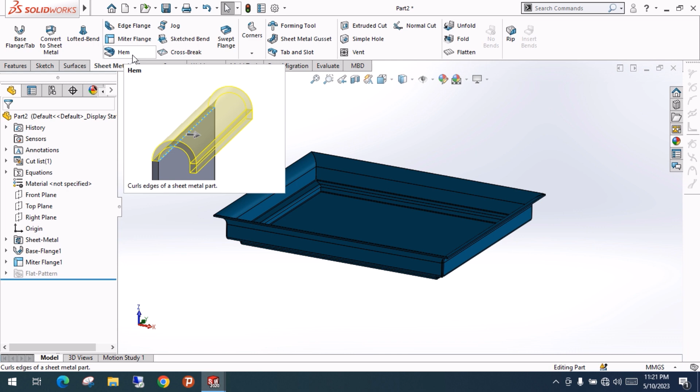We'll use hem for folding our outer edges. So how does it work? Let's see.

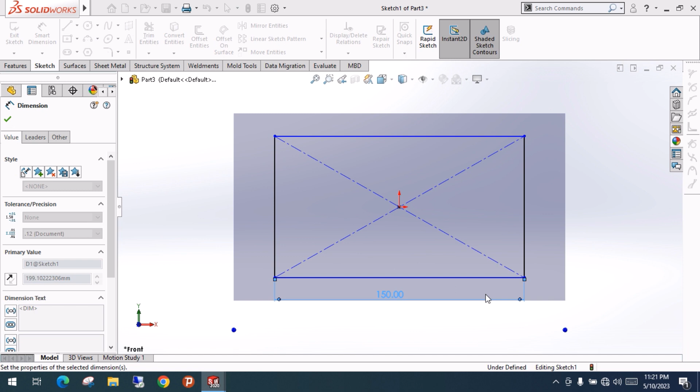I'm going to create a new part, clicking OK. Let's suppose we have a flat plate of some dimension. I'm just going to create a rectangle here, giving 150 - I'm taking a random dimension, you can take whatever you want. I'm just going to sheet metal and go to base flange and click OK. So this is our base plate.

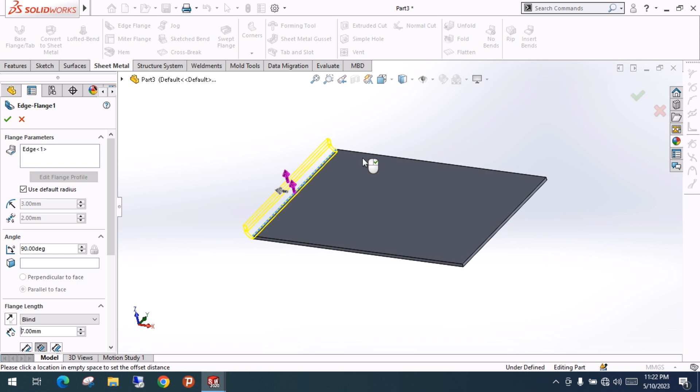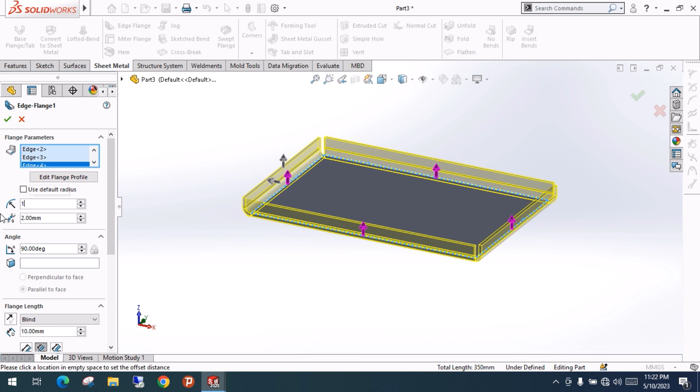I'm just going to create an edge flange here. So click here and select all four edges. I'm just giving the distance of 10 mm. We have to reduce some radius and it will be okay. So this kind of our plate is there.

You can just change the thickness a bit - let's suppose 0.7 thickness. This is actually a very less thickness. If you see here, these edges are sharp edges, you can say. If you want to fold these edges, you can just fold them by performing this hem operation.

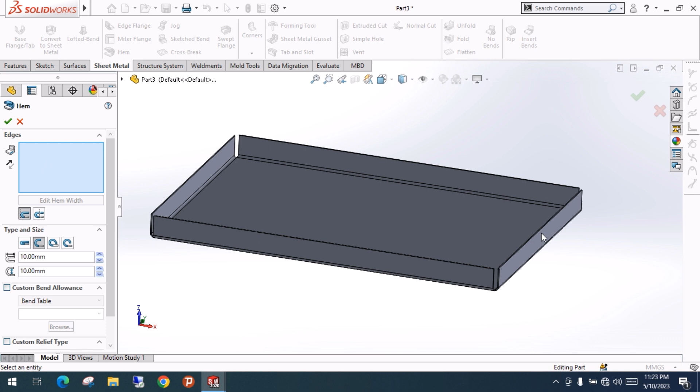So we will see the hem operation. We're going to select hem operation, and here we have to select the edges. I'm just going to select this edge here. By default, it is taking the whole edge and performing the hem operation, folding the plate over this side.

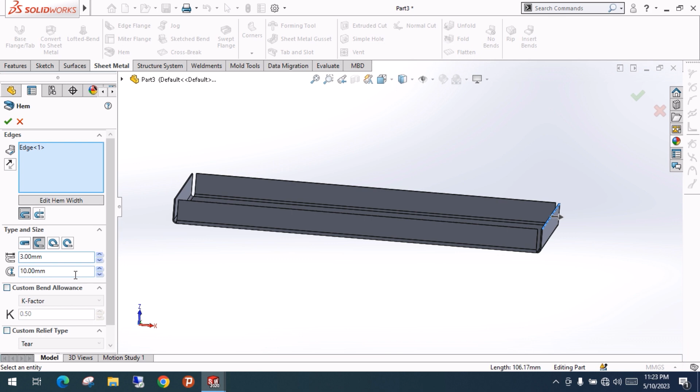So you can control the parameter here - this is thickness. You can just want like a 1 mm fold. Give it like 3 mm and give the radius around 1 mm. So it is folding like this.

You can control this fold from here as well. Suppose you want to fold the whole - if you don't want a gap between this folding and this base line, you can click this one, so there will be no gap, and you can click this one.

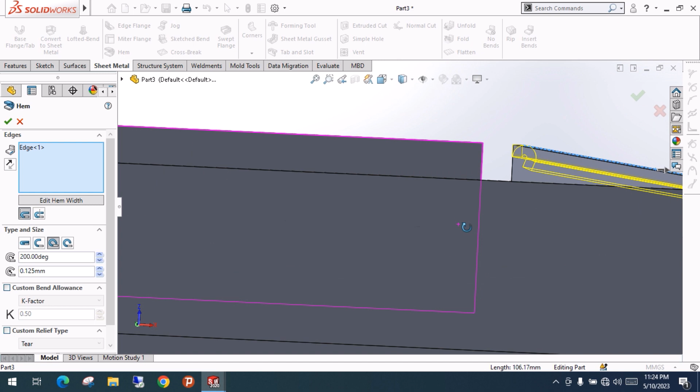You can also use the teardrop. What will teardrop do? It will just do some kind of folding - you can make a circular profile and then connect to the face of this edge.

And another one is the roll. In roll, you can control the angle here also, like if you give a 270-degree angle.

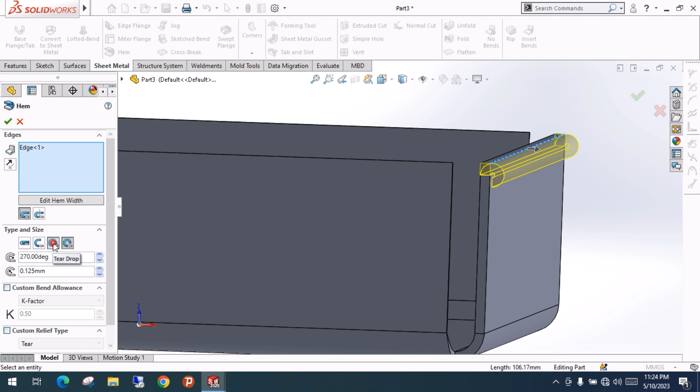What is the difference between this one and this one? If you see here, the end face is parallel to this one, as you can see here, and in this one it is tear drop. If you increase the angle here, like 245 or 225, the face is along this line - it is not parallel to this one. So this is the difference between them.

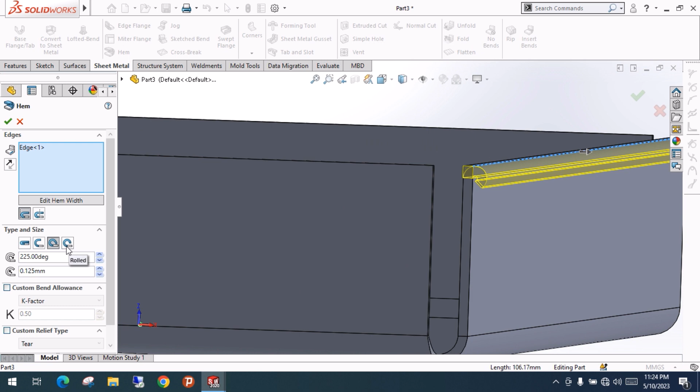Another thing you can do here - just make this one as it is, and we will perform another hem on the other edge. So I'm just selecting this one, and here is the option for hem, edit hem width.

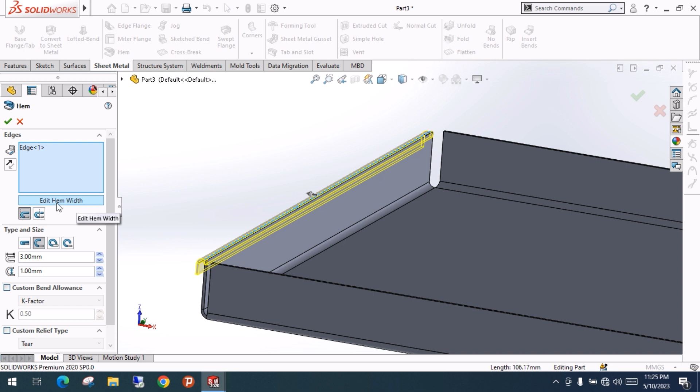If you click here, it says the sketch is invalid - you can perform the sketch and edit the sketch. Don't do anything with this one, just click on this line, whatever the sketch you have, click this and delete this constraint and move this line.

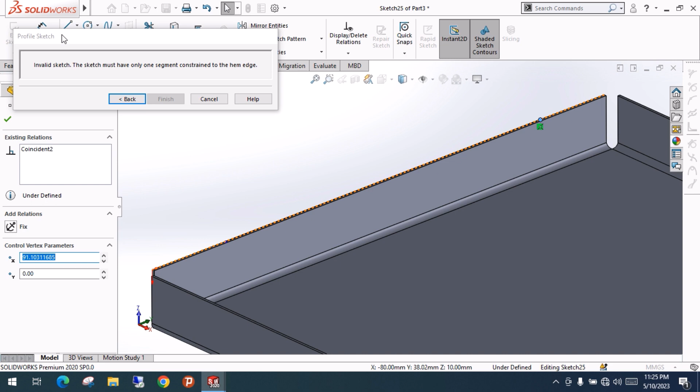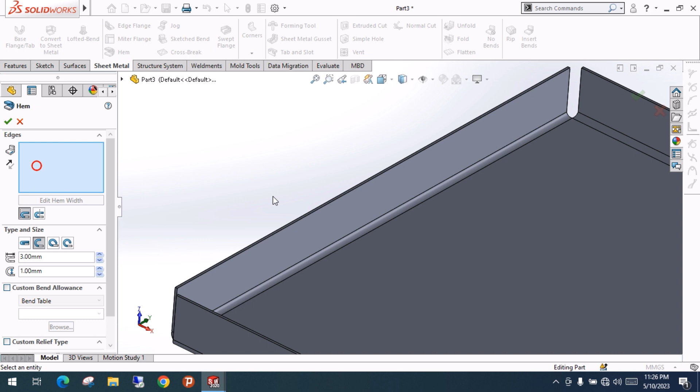We will just try one more time. So for hem, we have to first select the edge, then edit - okay, so it is showing valid. Just directly drag it

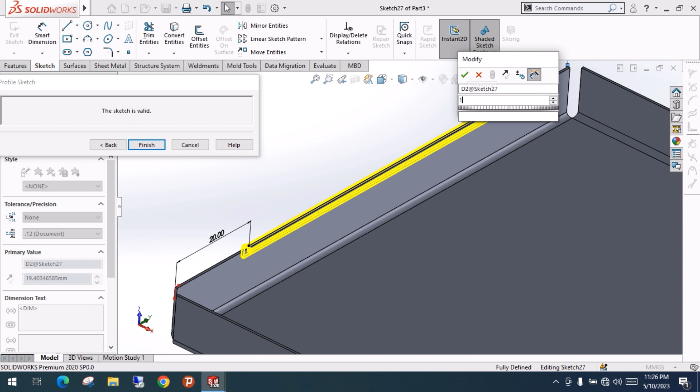up to the inner side. Don't delete the constraint actually. Just give the distance of 20, and from this end giving around 15. Click on finish.

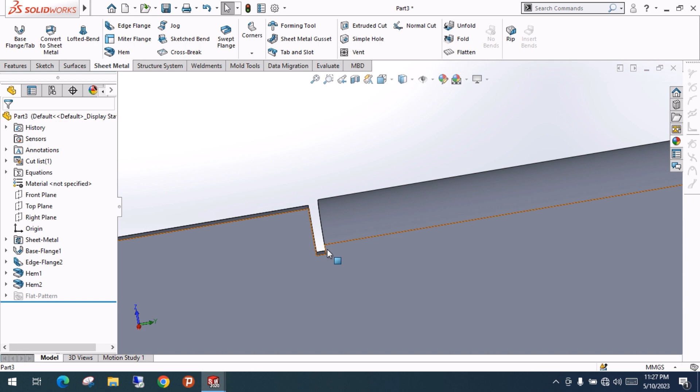So whatever the hem generated this time, it will be generated based on whatever sketch we provided. Since we edited the sketch, the hem is created at that particular edge only. If you see here, there is some kind of relaxation, you can say, or relief.

That relief you can control from here. By default it is making rectangular, so you can control from here. If you click on this custom relief type, there are three kinds of options.

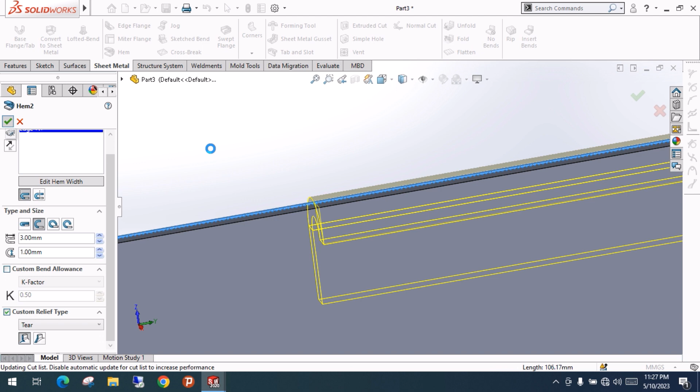Tear down is basically what - there will be no gap here, so the hem will be created directly this way. We generally do not perform this because it increases the stress concentration on this shape. So we use rectangular, or better, you can use the oblong.

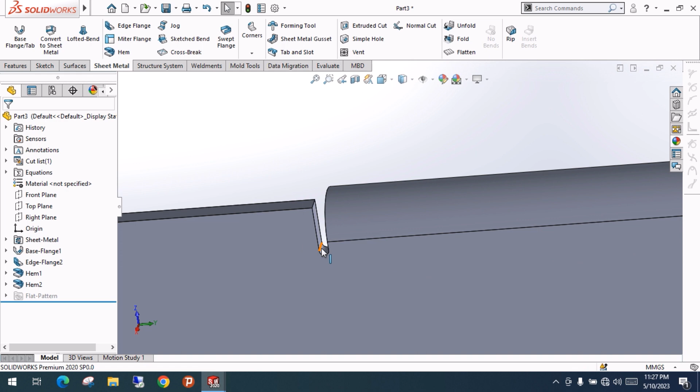This one - that will create a spherical kind of gap, so this one is better. You can control the radius of this one also.

Let's see, there is an option - you can control the ratio also. If you give the ratio of 1, it will increase your radius. So that is how you can perform the hem operation.

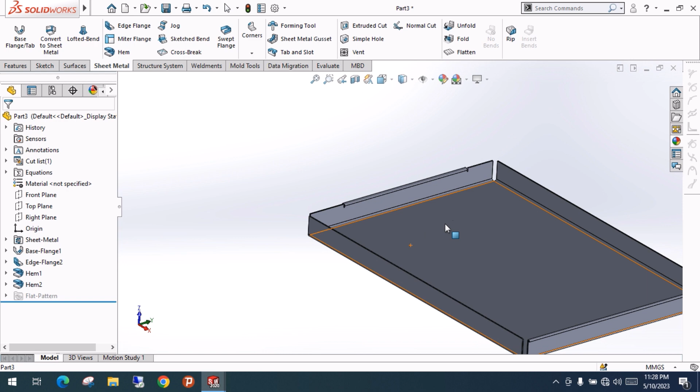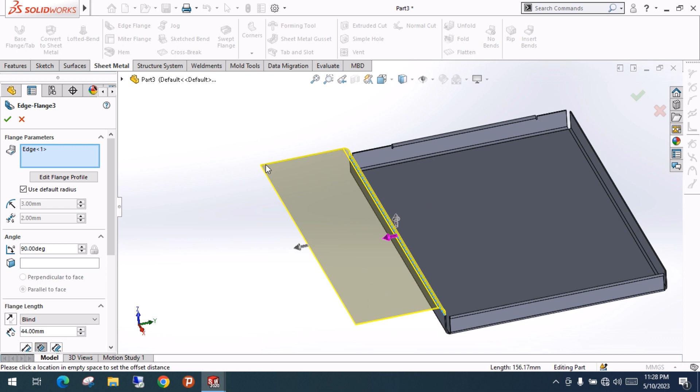One thing - the same thing you can also do on the edge flange. If you go to your edge flange, we will perform another edge flange. So if you go to edge flange, just click on this side. As we've seen, we can edit this flange profile.

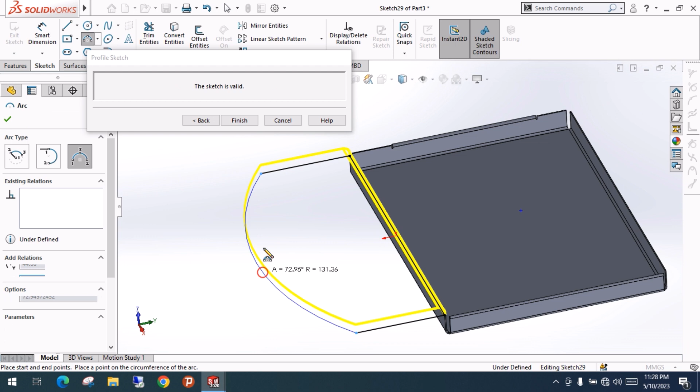Same as here, you can perform and create your own sketch here. Let's suppose I'm going to delete this one and make some arc here - kind of arc we can, and want some circular hole here. I'm just clicking on finish.

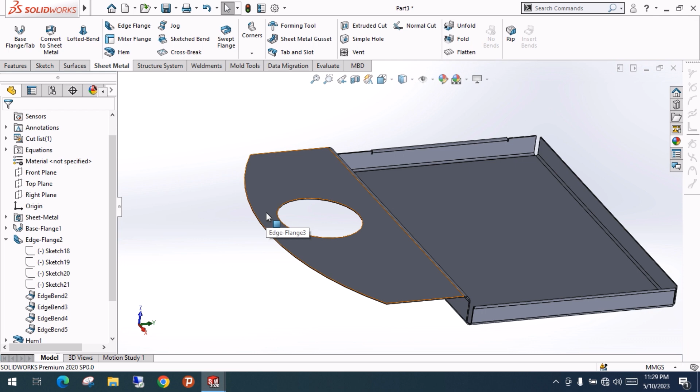Whatever sketch you create, that will generate the sheet metal part. This is how you can edit your sketch in the edge flange option. You can add the color here also. So this is how our hem is performed.